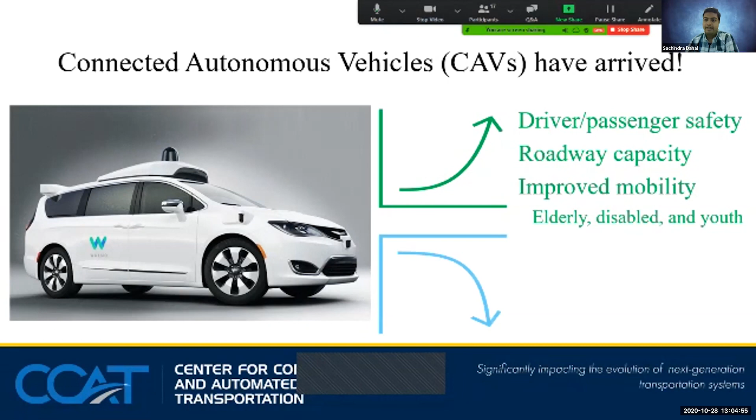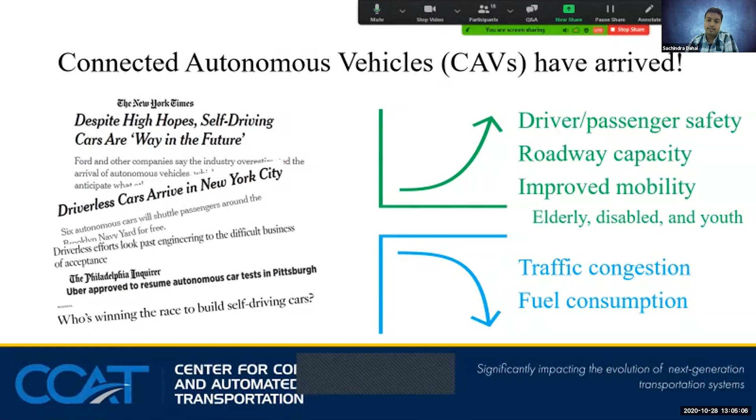Our first student is Sachindra Dahal from the University of Illinois. Sachindra, you may begin. Hello everyone, my name is Sachindra Dahal. I'm a PhD student at University of Illinois at Urbana-Champaign. I'm going to present about passive sensing of conductive concrete for vehicle lateral positioning. So connected autonomous vehicles have arrived in different shape, size, form with different promises. They provide increased driver and passenger safety, increased roadway capacity, improved mobility for elderly, disabled, and youth. And they also provide decrease in traffic congestion and fuel consumption.

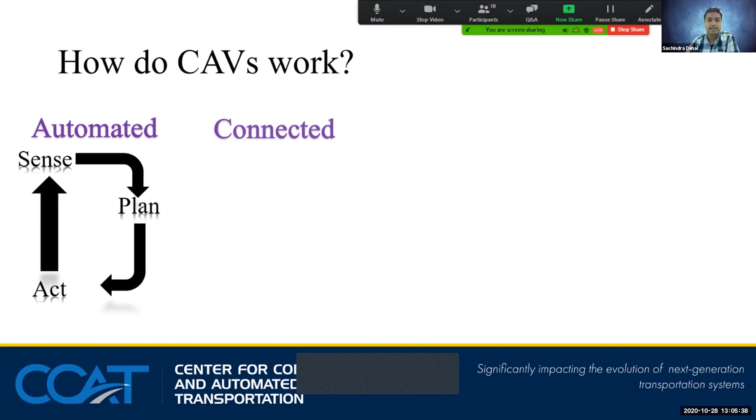So to discuss how CAVs work, they have 2 parts, the connected part and the automated part. The automated part consists of sensing, planning, and acting. The sensor senses the environment, then the machine learning or computer vision algorithms plan the path based on that, and the actuators execute the command given by these algorithms. And there is the connected part, which consists of DSRC or cellular methods to implement vehicle to everything communication, basically vehicle to infrastructure and vehicle to pedestrian.

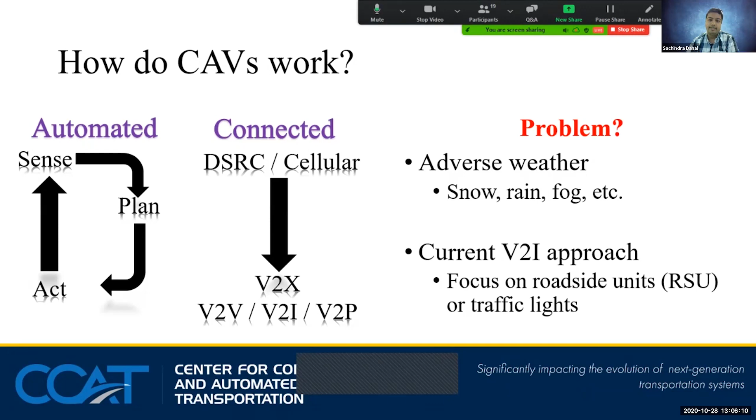But the problem is when we have adverse weather like snow, rain, or fog, the sensing part of the automated section gets affected. And the current vehicle to infrastructure approach just focuses on roadside units or traffic lights. So the biggest infrastructure, the road itself, is missing in action. Currently CAVs use GPS as a primary sensor to stay in lane, which gets coordinates from satellite. But the error is around 20 feet while the lane is just 12 feet wide. So the vehicles also use cameras with computer vision to find the lane markings and stay within the lane where the GPS tells it to. So basically it is sensor fusion of GPS, camera, LiDAR, and existing maps, using redundant information to predict better.

But one big problem is improper lane marking. Not everywhere is there proper lane marking. And even if there is proper lane marking, bad weather affects the camera. So lane markings are not visible, or the GPS signal is worsened. To put into context, 33 states receive more than 10 inches of snow annually. In February 2019, 60% of the US was covered in snow. So weather independence is needed for large-scale deployment of CAVs. So the question arises, are the roads smart enough right now? The answer is no, because they don't communicate with CAVs.

So roadways can actually supplement the current CAV sensors to improve lateral positioning, even when conditions are adverse. We can achieve that by using passive sensing. We can create a repeatable electromagnetic signature, which is pretty unique and can be identified by the autonomous vehicle. And we can create those signals in the pavement using construction materials commonly used in the pavement industry, like steel fiber or steel slag aggregates. We don't have to use expensive sensors or something that consumes power or needs a lot of wiring.

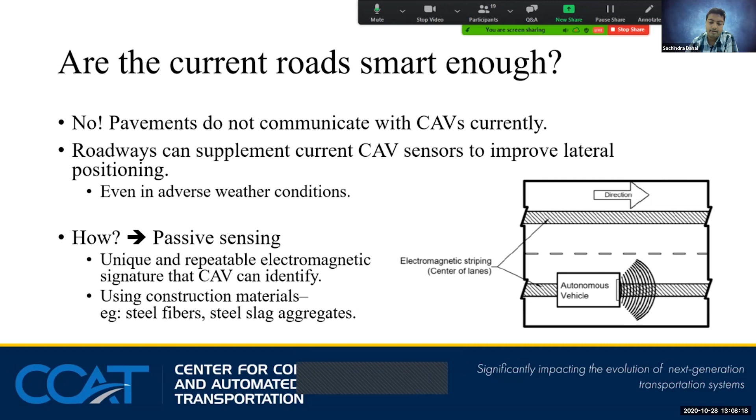So I'll discuss the lab testing that is going on here at U of I. We use a sensor, which is an induction-based eddy current method, and it creates an alternating magnetic field using a 10-inch diameter coil at 200 Hertz. Whenever a metal target is brought into this field, it induces an eddy current, which is detected by the sensor. In our case, it is steel fiber reinforced concrete.

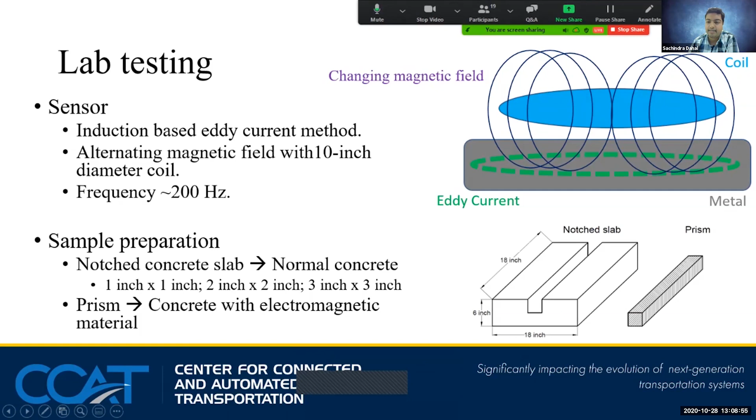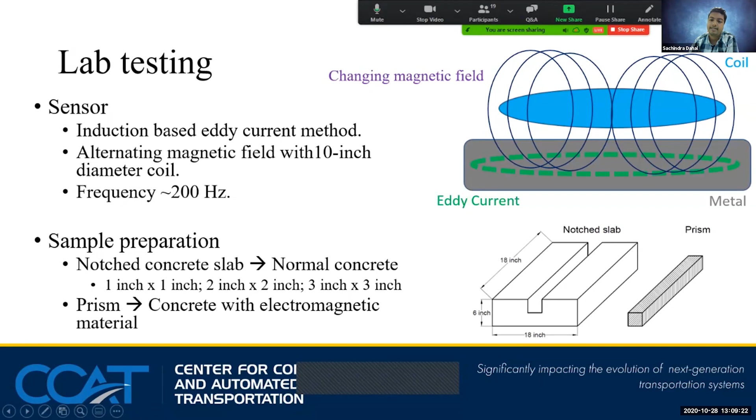So how we test it is we prepare a slab. We have made a slab which is 18 inches wide, 18 inches in length, and 6 inches in height. And on the top middle surface, we have made a notch which is 1 inch by 1 inch, or 2 inch by 2 inch, or 3 inch by 3 inch. And what we do is we make an electromagnetic prism, or a concrete prism that has steel fiber in it, and we make those prisms of the exact size and put them into this and do the testing.

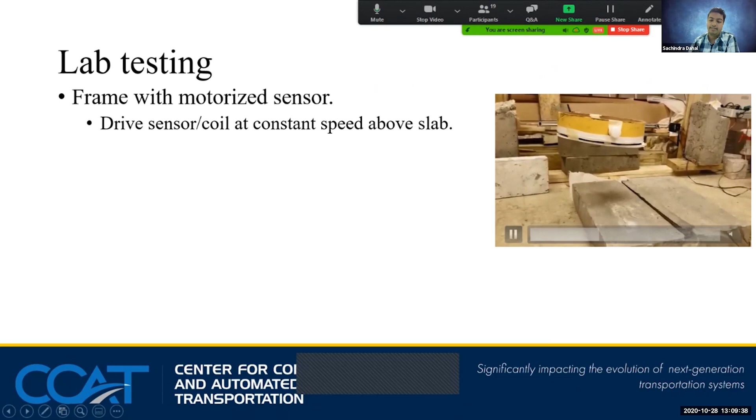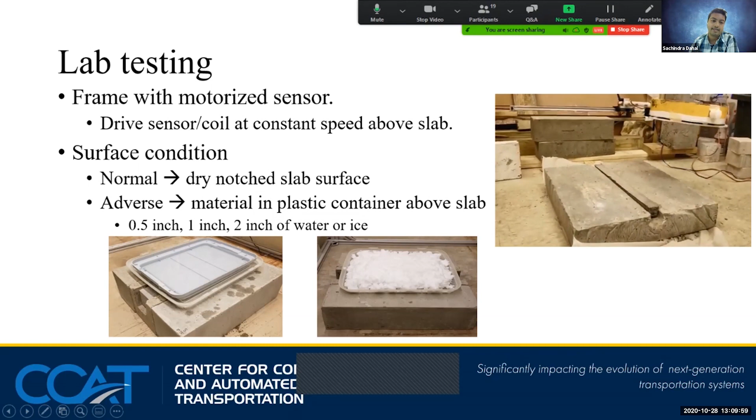So we mount the coil on a motorized frame, and the sensor is driven at a fixed height above the slab, and it is moved at a constant speed to collect the data. In addition to the normal surface condition, we also test it in different adverse weather conditions, which are created by having a plastic container, which is not electromagnetic, with 0.5 inch, 1 inch, and 2 inches of ice or water standing in the plastic container during the testing.

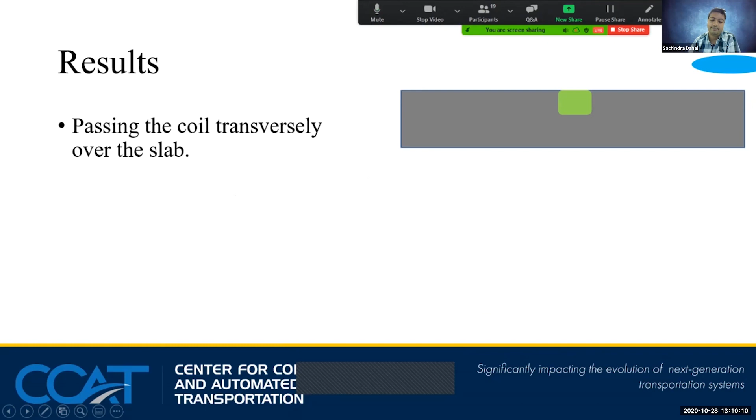So I'll present some of the results that we get when we pass the coil on top of the slab transversely. This is an example signature. What we observe is, there is this electromagnetic prism, and as we move the sensor above, the highest signal is achieved directly over the electromagnetic material. And as we move offset from that material, the signal drops off. This is an example where we change the height of the sensor above the slab. When we increase it from 5 to 6 to 7 inches, the signal decreases.

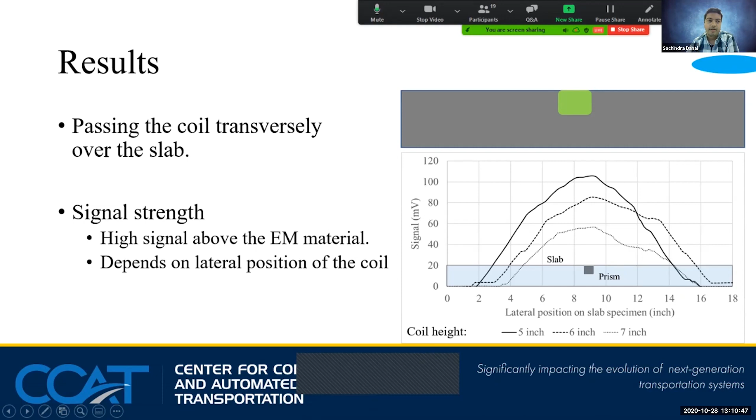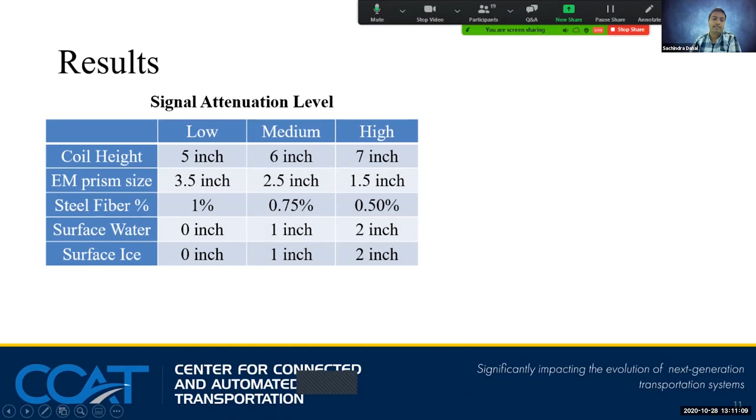So there are different factors that would attenuate the signal. To test that, we created different factors: sensor height, electromagnetic prism size, steel fiber content in the prism, and having water or ice on the surface. We changed these parameters at 3 different signal attenuation levels. The lowest signal attenuation gives us the best signal, and we increase each of these parameters and see how the signal deteriorates. For example, this point is when the coil height is at 5 inches, the steel prism is 3.5 inches wide, and we have 1% steel fiber without ice or water. We get this signal, and we change each parameter and see how the signal attenuates.

So what we observed is these 3 parameters, which are prism size, sensor height above the slab, and fiber content, attenuate the signal the most. And these are the factors that can be controlled during design. We can say what size of prism we need in the road, at what height we can put the sensor in a vehicle, or what fiber content we can put in the road.

As for water, when we had 2 inches of water standing on the slab, the signal attenuated by 23%, but it was still detected. And when we put 2 inches of ice on the surface, we did not see any signal attenuation. That's because ice has a dielectric constant of 3, which is similar to that of air, versus water, which has 81.

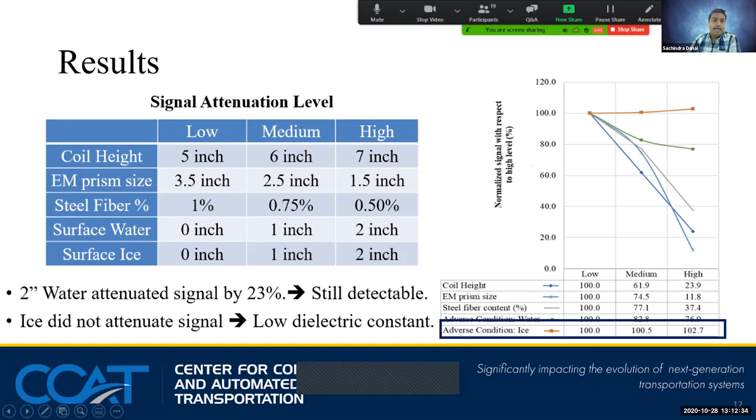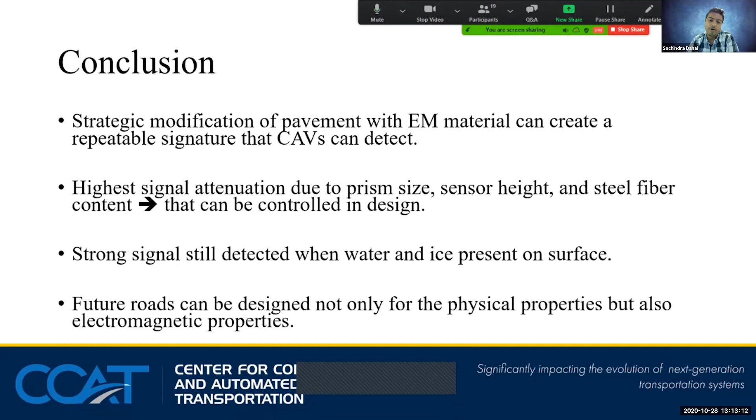So in conclusion, we can strategically modify the pavement material to create an electromagnetic signature that is repeatable and can be detected by CAVs. From our research, some of the highest signal attenuation parameters can be controlled in the design process. A strong signal was still detected when adverse conditions were present. And for the future, roads can be designed not just for physical properties, but also for electromagnetic properties to help connected and autonomous vehicles.

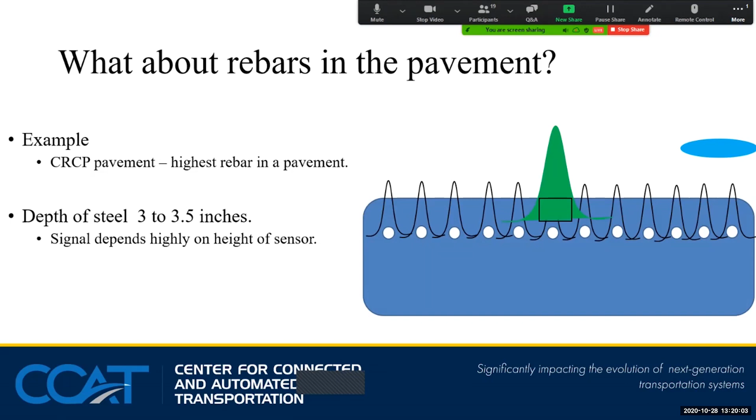Hello, everyone. I'm Xingmin Wang, a third-year PhD candidate from the University of Michigan, advised by Mr. Henry Liu. The topic I present today is the data infrastructure for connected vehicle applications. The data infrastructure we built is based on the Ann Arbor Connected Vehicle Test Environment, which is short for AACVTE project.

This project comes from the original safety pilot model deployment, which was started in 2012, and in 2015 the safety pilot model deployment project became the current AACVTE project, which is still the largest operational real-world deployment of connected vehicles. For the vehicle deployment, the AACVTE project has installed over 2,500 vehicles, which were equipped with either aftermarket safety devices or vehicle awareness devices.

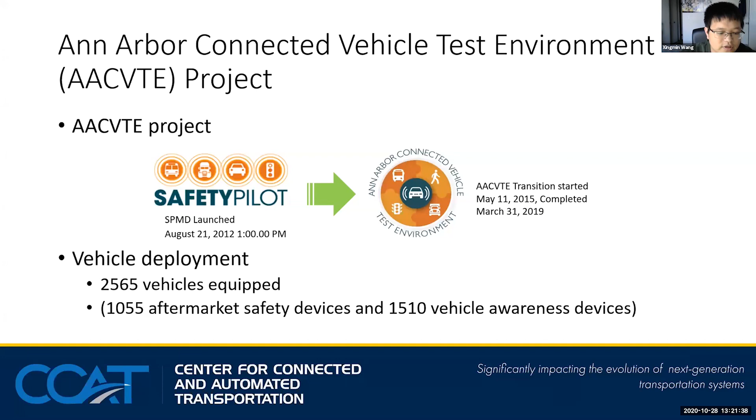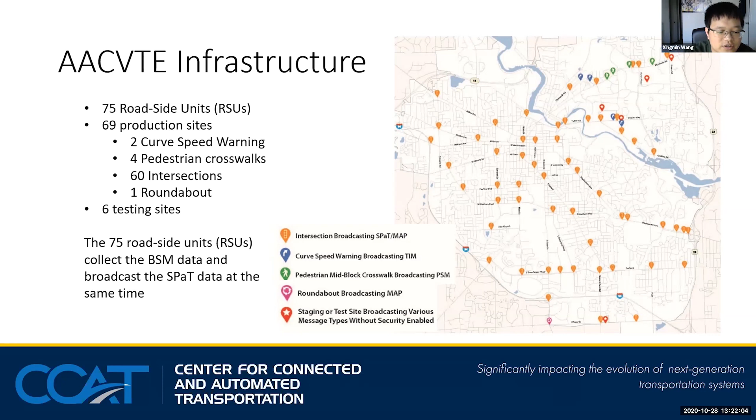From the infrastructure side, the AACVTE project has installed over 75 roadside units, including 69 production sites and 6 testing sites. All the roadside units collect the basic safety message data and broadcast the signal phase and timing data at the same time. The communication range between the vehicle and the roadside infrastructure is about 100 to 200 meters.

For the data contents, we have 2 main data sources. The first is the basic safety message data broadcast by the vehicles, which follows the SAE standard. This message contains the real-time latitude, longitude, and time stamp, and also other safety-related messages of the vehicles. The other data source is the SPaT data, which is the signal phase and timing data. This data is sent directly from the controller, and contains all the signal states of the intersection phases.

For the resolution and the transmission delay, both data were sent every 0.1 second, and the delay was within 1 second, which can definitely support real-time applications. Based on this data collected from the AACVTE project, we built a data infrastructure to process and visualize the raw data for real-time connected vehicle applications.

Basically, the data infrastructure contains 3 parts. The first is the data receiving part, the second is the data pre-processing, and the last is the upper layer applications. For data processing, we have 2 different data sources. The first is SPaT data, and then the BSM data. Both have to be decoded before they can finally be used. From the other side, we also need offline map data, which is from the open source map, OpenStreetMap.

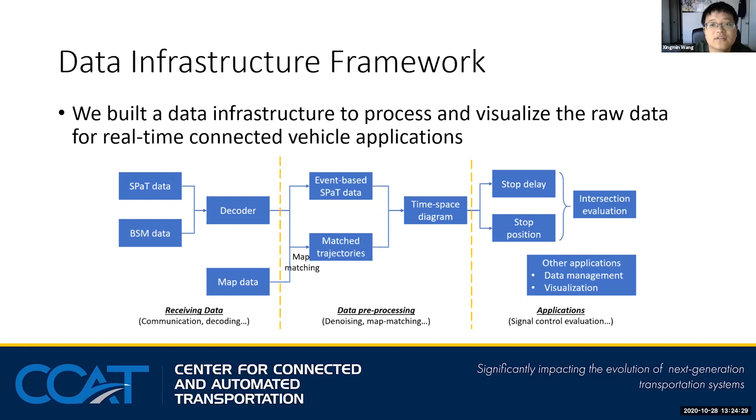Due to the limited time, I will skip some of the data pre-processing procedures, such as the denoising and the smoothing. The most important part of the data processing is the trajectory data map matching. The BSM data we collected is only collected near the roadside units, so the map matching here is to match the trajectory data to the corresponding movements.

And here we use a hidden Markov model to match the trajectory data. As shown in the left figure, both the movements shown by the blue lines and the trajectories shown by the red lines can be represented as a vector composed of series GPS points. And the xi here is the GPS point of the trajectory, and the di here is the distance between the trajectory point and the road movement. And the phi here is the angle between the heading of the vehicle trajectory and the road movement. And for the hidden Markov model, we consider 2 factors to do the map matching.

The first is the state probability, which is the distance between the GPS point and the road movement. Here we assume that given a trajectory belongs to a road movement, the distance follows the Gaussian distribution. And the other side is the transition probability in the hidden Markov model. Here we define this as the heading angle between the vehicle trajectory and the road movement. Basically, here we assume that the transition probability follows exponential distribution.

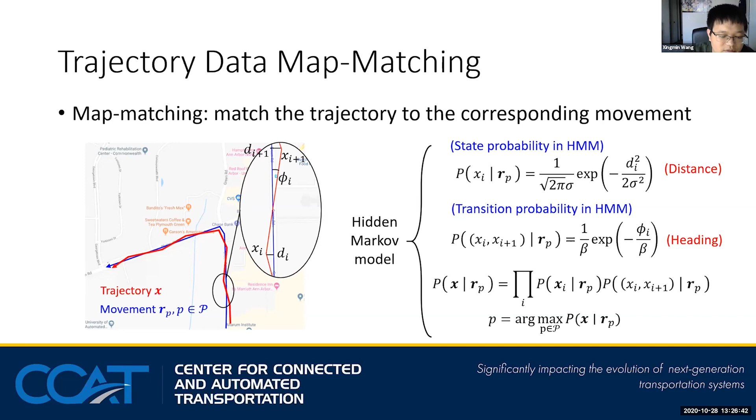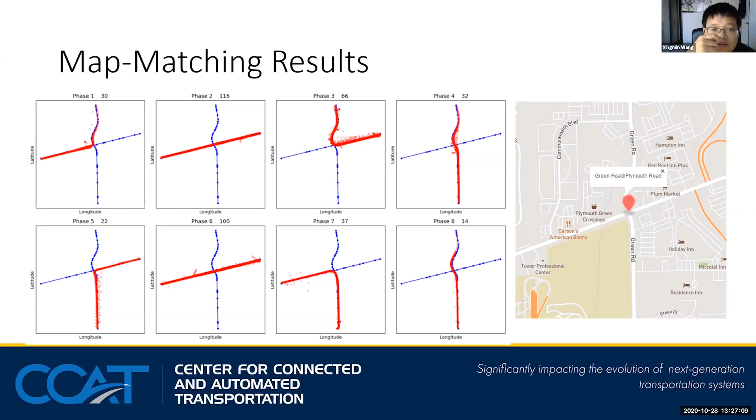And here are the results for the trajectory data map matching. Each subplot stands for a movement of the intersection. The horizontal axis is longitude, and the vertical axis is latitude. The blue points and the dots are the road, and the red points are the matched trajectories. As we can see, using our algorithm, most of the trajectory points were matched to the road correctly.

And combining the signal phase and timing data and the matched trajectory data, we can draw the aggregated time space diagram to evaluate the traffic intersection signal control. Since most of the traffic signals in the city of Ann Arbor are actuated or adaptive signal control, the cycle lengths of different cycles are usually different. So here is what we do to draw the aggregated time space diagram. We have the trajectories of different cycles, and we can shift the trajectory in different cycles so that they share the same green start time. And finally, we can draw the aggregated time space diagram, which will be frequently used to evaluate the efficiency of the intersections.

And to evaluate the traffic signal control, we also draw the stop delay scatters and the stop position scatters. So the left figure shows, given a trajectory, how we can calculate its maximum stop position and also the total stop delay. And with this method, we can plot each trajectory as a point to get the stop position scatters and the stop delay scatters as shown by the two right figures. The horizontal axis is the time of day when the vehicle traverses the intersection, and the vertical axis is the stop position and the stop delay accordingly. And based on these figures, we can easily evaluate the efficiency of the intersection signal control.

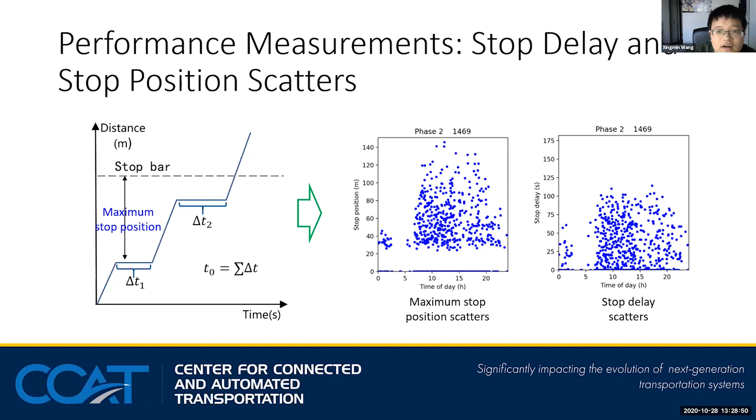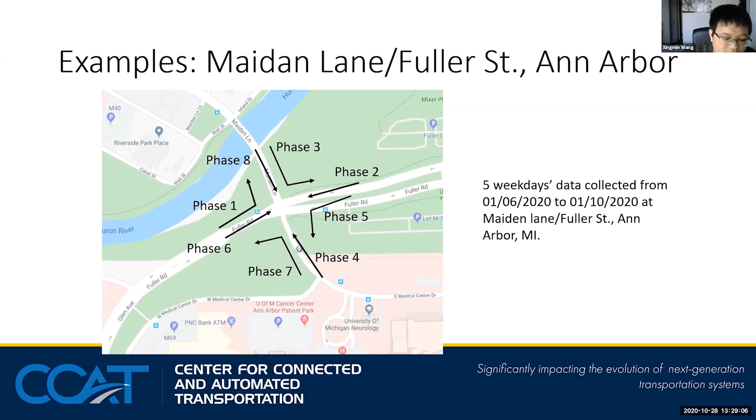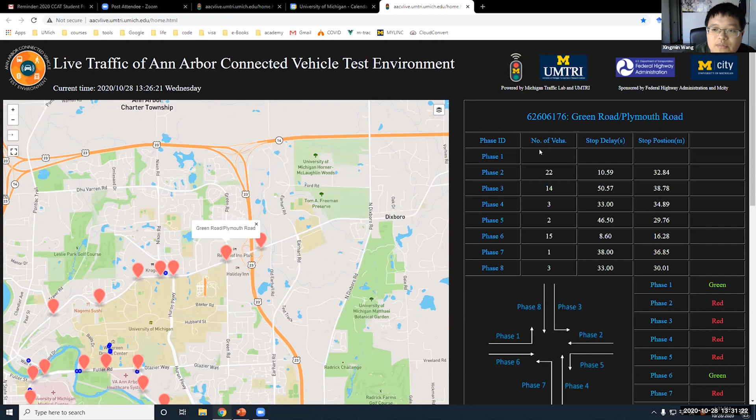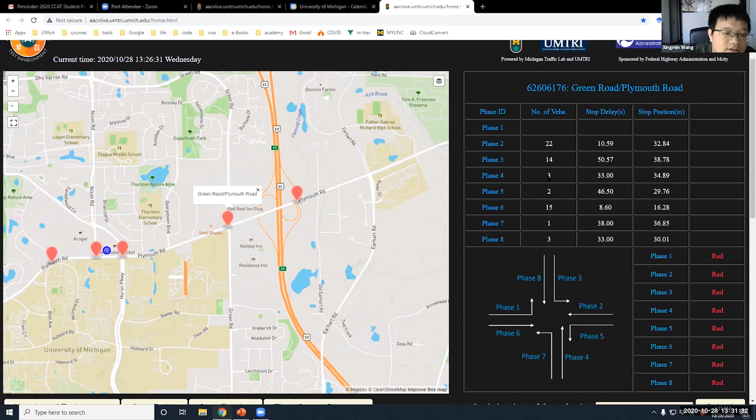And from this website, if we click on the markers, we can see the basic statistics of the specific intersection. For example, the number of vehicles passed by the intersection for different phases, also the average stop delay, average stop positions, and also the plots we mentioned before, including the stop delay scatters, the stop position, the time-space diagram, and also the number of vehicles within the day.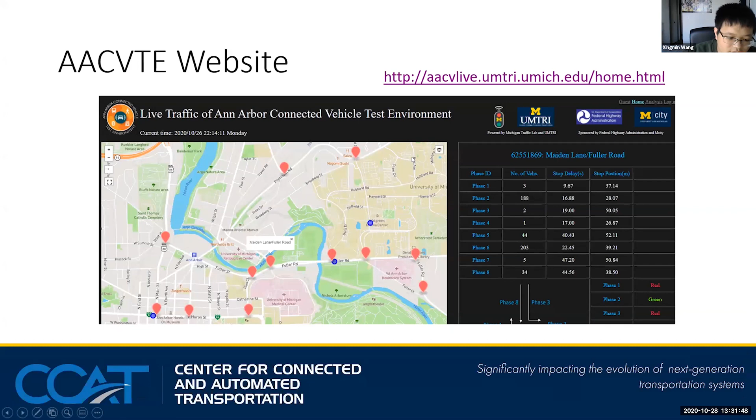Okay. As we mentioned before, there are different applications that can be built based on these data infrastructures that were developed. For urban traffic mobility, we can use this data for traffic estimation and traffic signal control. Actually, this is what I have done all the time. And on the other side, we can use this data to do some safety measurement.

For example, as far as I know, I'm very glad that this data set has supported at least 2 projects. The first is to use this data to identify the aggressive drivers, and the other project I know is to use this data to detect the dilemma zone, and furthermore to optimize the yellow and all-red clearance time of the intersection.

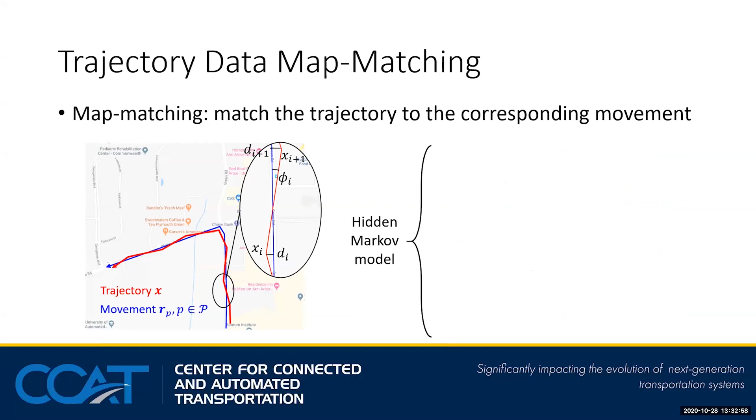Yes, I have a question. I'm trying to understand your overall process. So the cars which are equipped with the receiver for the connected vehicles, they are driving around and they're communicating with the infrastructure, and then the cars are sending this data to a server. Where is the raw data coming from, and going to where before you're doing the processing?

Okay, I'm sorry that I did not make this part clear, and I will try to explain it. So first, the car equipped with the onboard unit can broadcast the basic safety message, and this data will be sent to the roadside unit via DSRC, and then the data is transferred through IPv4 to the city network, and then the data is forwarded to the server located at Ann Arbor, and then we can query the data through UDP.

So what is the delay from when the car is sending the data to when it arrives at Ann Arbor? And then what additional delay for processing? Here is the delay. So the average delay for the basic safety message is about 0.3 seconds, which means that from when the data was generated from the onboard unit until we receive it, the overall delay was about 0.3 seconds. I see. So overall delay is around 0.3 seconds.

Okay. Thank you. So currently, when we look at traffic signal performance measures, we talk about arrival on green. So is your system equipped to measure that so that we can do some automated signal performance measures? Yeah. Actually, currently we use these 2 plots to evaluate the traffic signal control. The first is the stop delay scatters. Basically, we calculate the stop delay for each trajectory and plot it in these scatters.

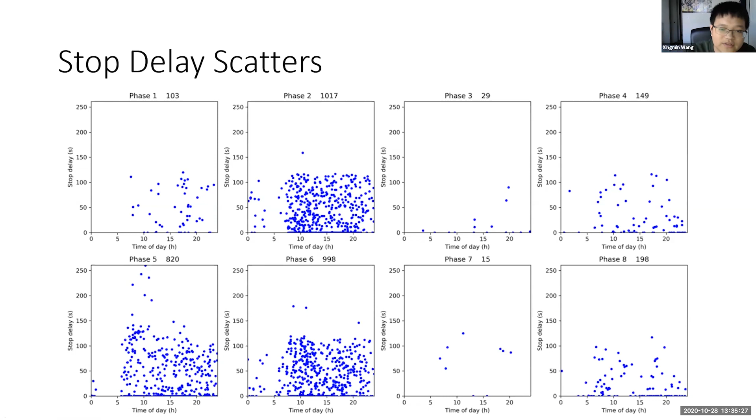And this is for the delay. And we also have the stop position scatters. This stands for the queue length of the different phases.

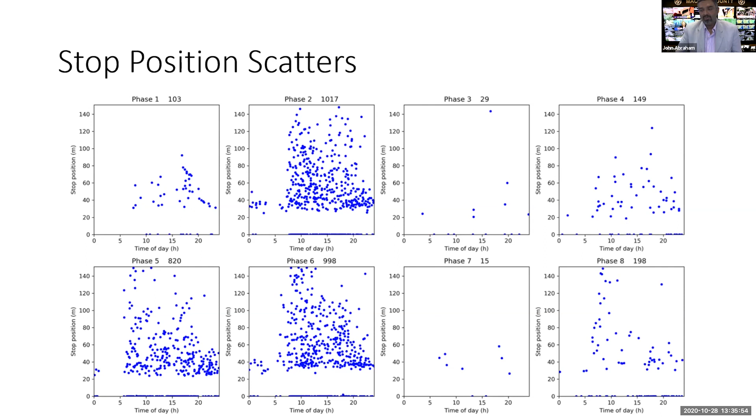Now, you talked about applications for transportation engineering. How much penetration of vehicles? For example, do you need 20% connected vehicles in a traffic stream to come up to having useful data for these traffic applications? Well, that's a very good question, and this is a research topic I have done since last year.

The intuition is that if we have different levels of the penetration rate, we can do different levels of traffic signal control. For example, if the penetration rate is too low, then maybe we can only use it for the fixed timing plan optimization. But with a higher penetration rate, we might be able to use this data to perform real-time signal control.

But for this data set, currently the penetration rate is less than 3%. So we might not be able to use this data for real-time signal optimization, but we might be able to use this data to optimize, for example, a fixed timing plan or something like that. I think the penetration rate will be okay for the fixed timing plan optimization.

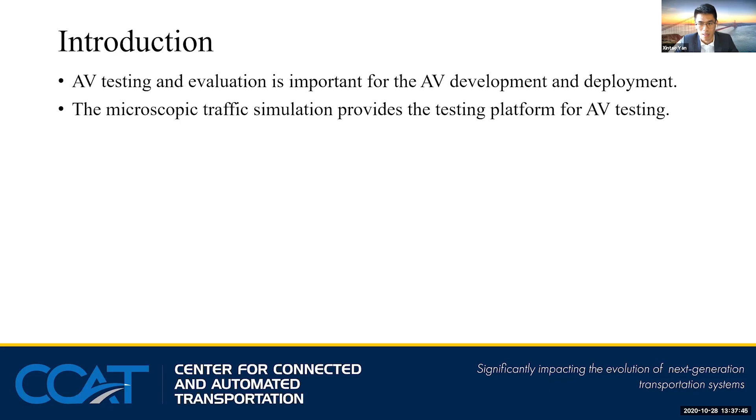So the first thing is that AV testing and evaluation is very important for AV development and deployment. Microscopic traffic simulation provides a testing platform for AV testing. The key idea is to test the AV safety performance in the simulation environment and make statistical comparisons with human driver performance. For example, here are two widely used microscopic traffic simulators, VISSIM and SUMO.

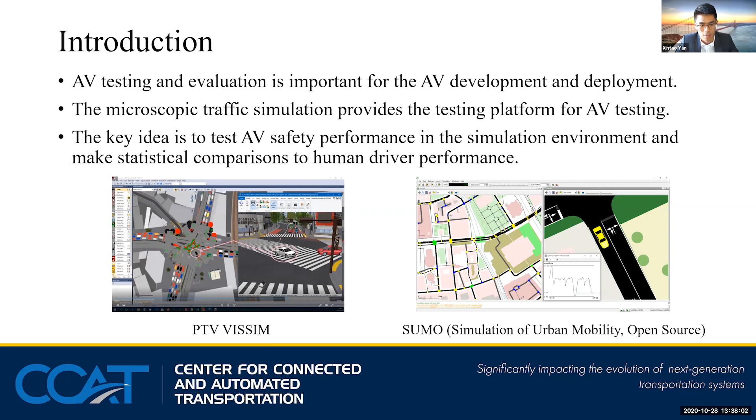However, one key problem with existing microscopic simulation platforms is that the traffic behavior models lack fidelity and cannot be directly used for AV testing purposes. The major goal of existing behavior models is to evaluate the traffic efficiency and emissions of large-scale transportation systems. Therefore, the models were designed to roughly capture normal behavior patterns, and usually only a small set of data is used for model calibration.

However, for AV testing, the major goal is to evaluate the accident rate of the autonomous vehicle in a real-world traffic environment. For human drivers, the accident rate is normally about 10 to the minus 6 to 10 to the minus 8 per mile from naturalistic driving data. Therefore, for these rare accident events, the traffic behavior models should be precise in both normal and rare conditions. So there's a huge gap that needs to be filled.

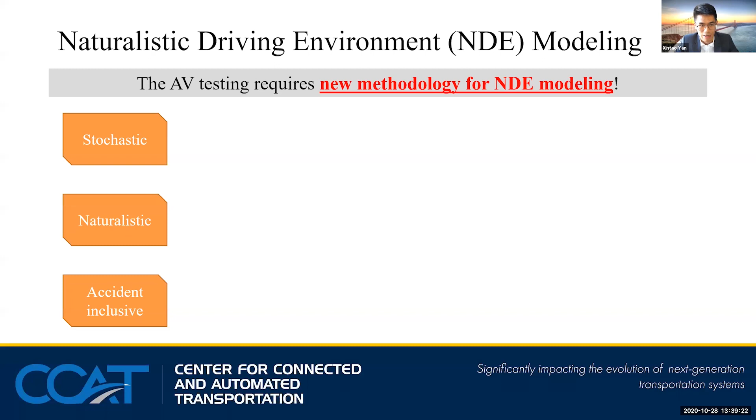We denote this problem as the naturalistic driving environment modeling problem. We need to generate a naturalistic driving environment which is stochastic, naturalistic, and accident inclusive. To generate such an environment, the behavior model of the vehicles needs to be distributionally consistent with the real-world traffic environment.

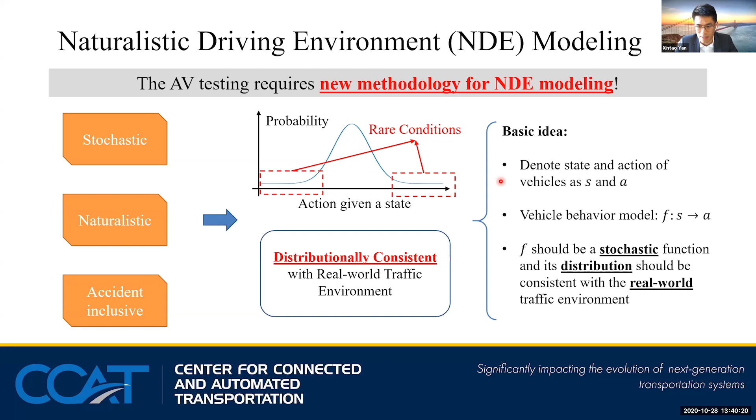To further extend this idea, we denote the state and action of vehicles as S and A. The vehicle behavior model is actually a function, a mapping F from the state to action space. The function F should be a stochastic function, and its distribution should be consistent with the real-world traffic environment. Therefore, we propose the framework of data-driven naturalistic driving environment modeling.

There are three steps. The first one is naturalistic driving data collection and pre-processing. The naturalistic driving data, NDD, is very important because it records human driving behaviors when facing different situations, which is very important if you want to construct a realistic environment. Here we use the NDD collected by UMTRI at the University of Michigan for this study.

The second step is data-driven driving behavior modeling. From the NDD, we can classify driving behaviors into categories, for example car following, lane changing, free flow, etc. Then we get the empirical behavior models, the empirical distributions of the behaviors. For example, this figure shows the longitudinal acceleration distribution in free flow driving situations, given different speeds of the ego vehicle.

However, due to inevitable data noise and the high dimensional nature of human driving behaviors, simply using the empirical behavior models may lead to bad results because the error accumulates along the simulation. Therefore, we proposed optimization-based smoothing techniques to improve the empirical behavior models to match the empirical measurement distribution. For example, we choose the velocity distribution, obtained directly from the NDD, and match the simulated velocity distribution with the empirical one from the real world.

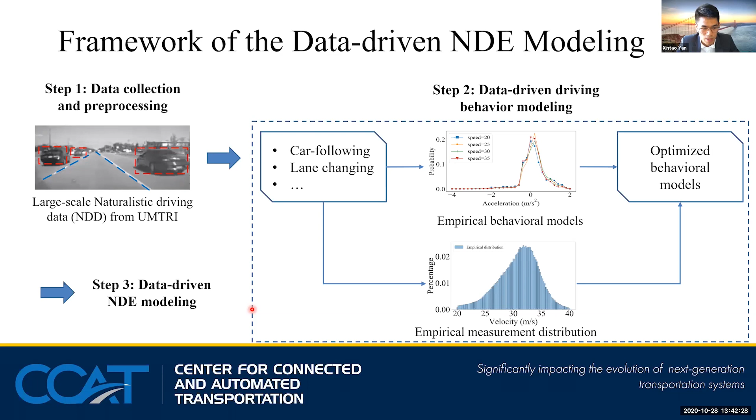Here is how we optimize the longitudinal behavior models. Due to the time limit, I won't go into the details of the optimization formulation, but the key idea is that we model the NDE as a Markov chain, and the convex optimization problem is formulated to optimize the longitudinal behavior model to reach a realistic NDE.

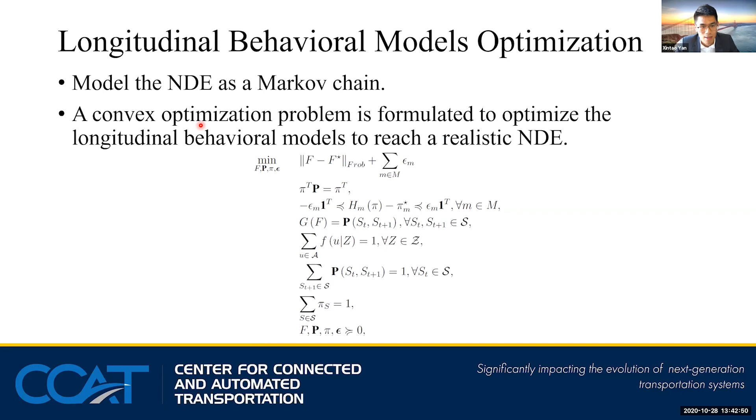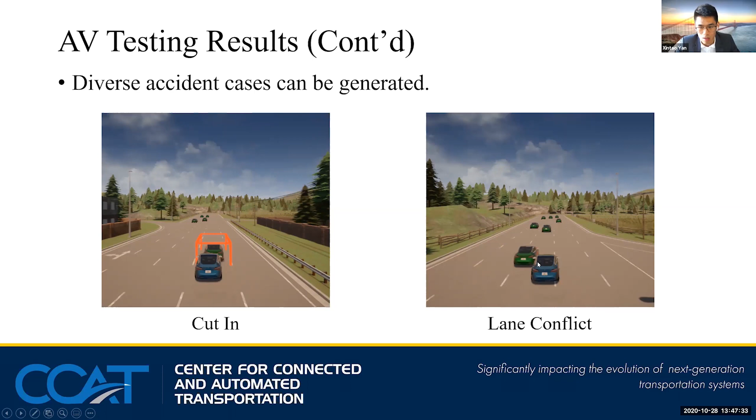Sorry. Okay, this is our results.

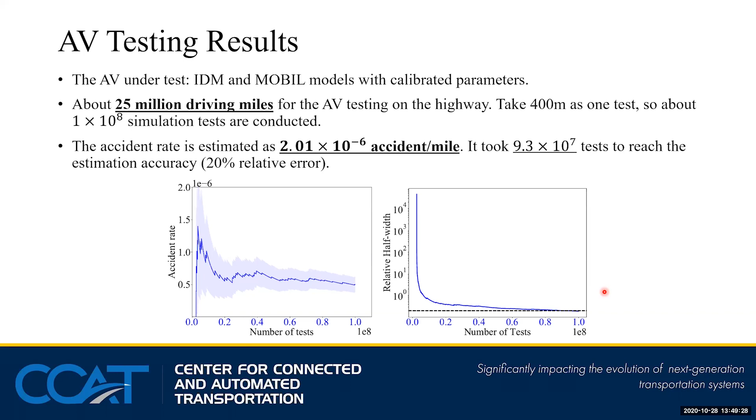That's a very good question. The idea we are using here is that the behavior model directly comes from the NDD data, and after optimization, we choose certain measurements to measure the error, whether this simulation produces a good environment compared with the real world. So here we choose velocity and spacing, because the velocity of vehicles and the distance between each vehicle is very important and will affect AV performance in the testing, right?

Yes, do you have an idea of what you need to do to make the distribution much closer? Oh, yes. The reason why there's still a gap here is because in the optimization step, we do some relaxation. So the model is not exactly accurate, for computational burden consideration. So maybe in the future, we will improve the optimization formulation to make it more accurate, to discard some of the relaxations. And another way is that we might try different methods, maybe machine learning based methods, to substitute these optimization methods to further improve the model performance.

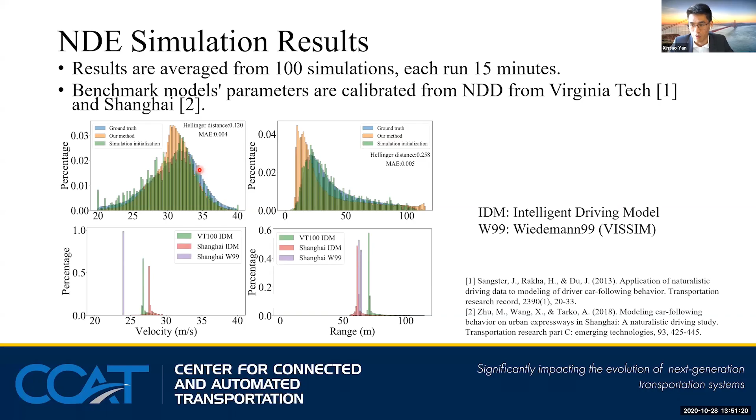Today, I'm going to talk about the integrated traffic signal and vehicle trajectory control in a mixed traffic condition. I think most of you have heard of connected and automated vehicles. They can communicate with other systems by V2X technology, sense the environment, and perform specific driving tasks with automation. Here, I give you two examples of connected or automated vehicles in University of Michigan. The first one is an M-Bus, which is a connected vehicle. The second one is a Navya shuttle running in M-City, which is an automated vehicle.

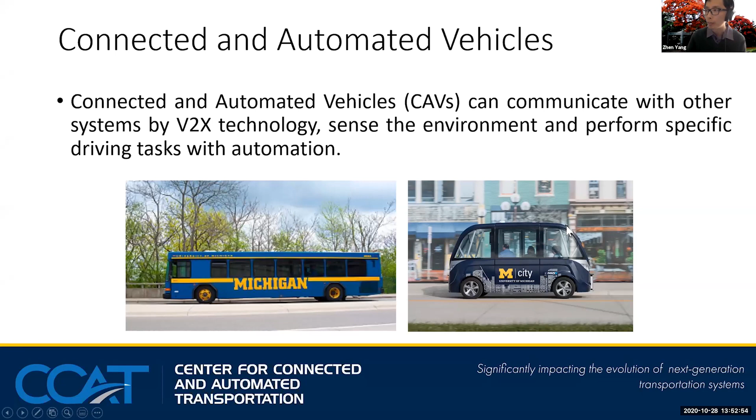The current existing solutions to CAV, say SAE level 3 or higher, require multiple expensive onboard sensors. So if we look at the automated vehicle of Google, you can see that it has a LiDAR, radar, cameras, all different kinds of expensive onboard sensors. It also requires complicated trajectory planning and vehicle control algorithms, which bring a challenge in real-world implementation, especially in urban traffic. One way to address this problem is to have smart infrastructure. So this table is provided by researchers in Europe. They define the infrastructure level.

With the lowest level, we have the conventional infrastructure. And when we improve the smart infrastructure level, we can have the map information support to CAV, we have the dynamic information, say the weather condition, or we may provide cooperative perception so the smart infrastructure can perceive the traffic situation and provide those perception to CAVs.

And finally, we have the cooperative driving smart infrastructure, which can provide support to CAVs and manage all vehicles in mixed traffic conditions. So the key research question is whether we can improve the smart infrastructure level to have lower requirement for CAV level.

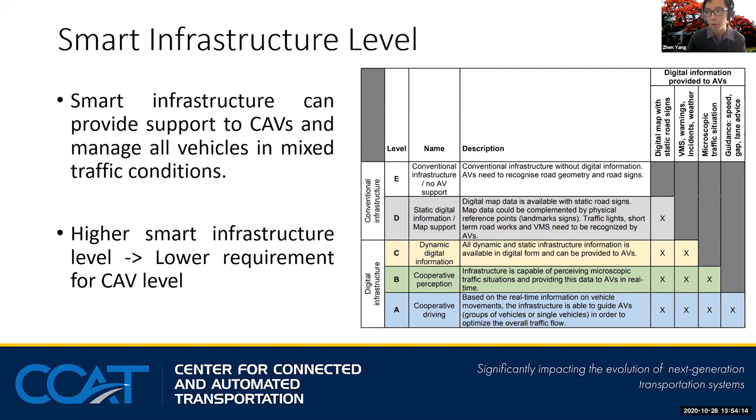That's the reason why I proposed this cooperative driving framework, which mainly includes two parts, the CAV module and infrastructure module. So we consider a mixed traffic condition in which we have the connected and automated vehicles. Those vehicles can broadcast their basic safety message, and they can also be controlled by some specific algorithm. We also have connected vehicles which are driven by human beings, but they can also broadcast their information.

And finally, we have the regular vehicles, which are driven by human beings. They do not have any connectivity or automation. So for the connected vehicles, we consider the cooperation between CAVs. When several CAVs are close to each other, they can form a platoon. The platoon may split. And for the leading vehicle of the platoon, it needs to plan the trajectory for the whole platoon, whether the platoon needs to stop, speed up,

cruise, or slow down. The main functionality of the smart infrastructure is signal optimization, which optimizes the time of arrival for each CAV at the stop bar, which will be sent as guidance to each CAV.

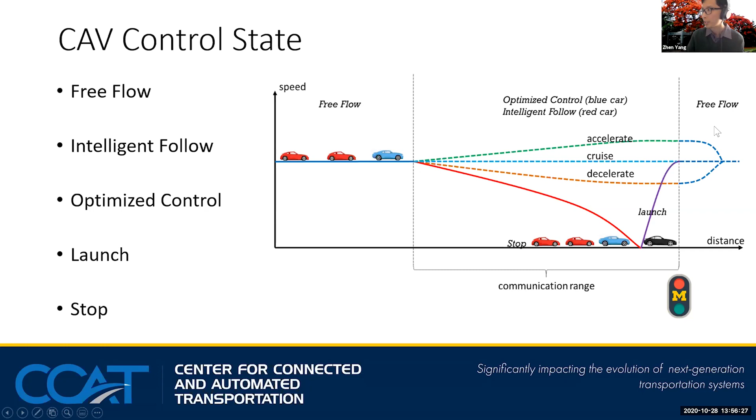Next is the infrastructure module. The first functionality is queuing prediction. Basically, all the vehicles are sorted based on the distance to the stop bar. For connected vehicles or connected and automated vehicles, we can use their basic safety message to get the distance to the stop bar. For regular vehicles, we use an entrance loop detector to estimate their distance to the stop bar.

After that, they are searched successively to determine whether a vehicle will stop. With queuing prediction, we are able to provide the green window information for a CAV to say whether it can pass this intersection.

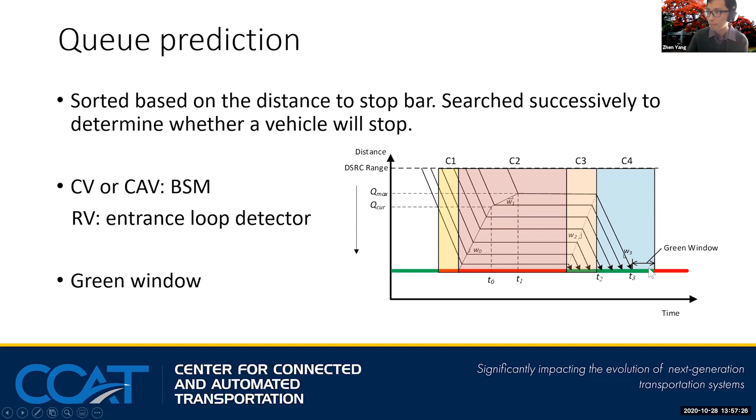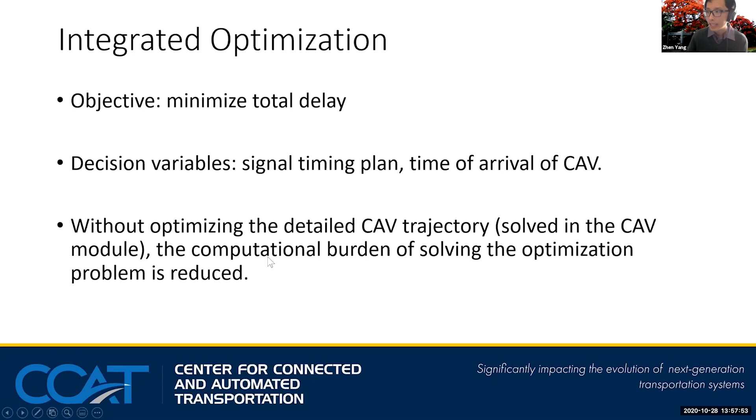Another very important functionality of the smart infrastructure is the integrated optimization. The objective is to minimize the total delay of all vehicles. The decision variables are the signal timing plan and also the time of arrival of each CAV. Notice that we do not optimize the detailed CAV trajectory at the smart infrastructure. The detailed CAV trajectory is solved in the CAV module. In this way, we reduce the computational burden at the smart infrastructure.

Here is the simulation analysis.

In the infrastructure module, we have the queuing profile prediction and signal optimization. So after the signal optimization, the optimized signal timing plan will be sent to the signal controller, and the arrival time will be sent to the CAV module to plan its trajectory. After the simulation, we'll use the post-analysis module to get the fuel consumption and emission.

So we use the intersection of Plymouth Road and Murfin Avenue in Ann Arbor, Michigan. The baseline we have is actuated signal control. And basically, we conducted two groups of experiments: the first one is with CAV and CV. The second one is with CAV and RV, and under different penetration rates.

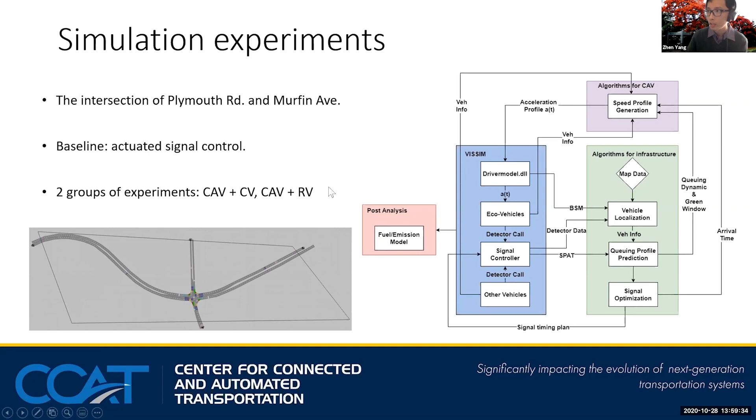The second group is with CAV and RV. In general, the performance is still similar. When we have more penetration, more CAV, we can have better performance in terms of mobility and fuel consumption. There's just one thing for the number of stops. As you can see, if we increase the penetration rate, the performance goes worse a little bit and then goes better. The reason is that with regular vehicles, we cannot estimate the queue length very accurately. So that actually leads to a bad performance when we have less CAV.

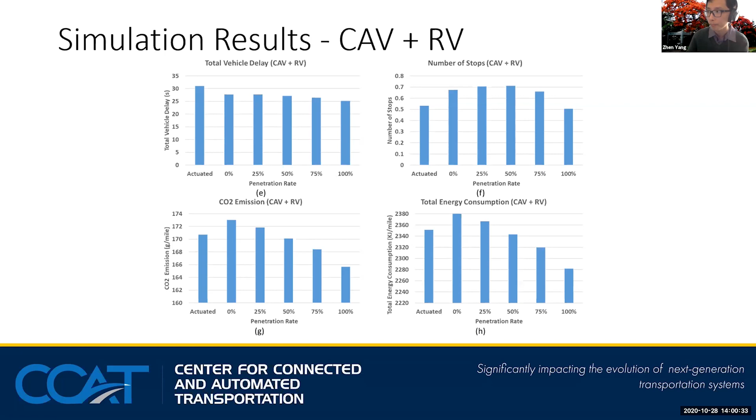So in conclusion, I proposed a cooperative driving framework in a mixed traffic condition of regular vehicles, connected vehicles, and connected automated vehicles. At the CAV module, we proposed a CAV control state transition diagram for different operating modes. At the infrastructure module, we optimized the traffic signal and also the CAV time of arrival with a mixed integer linear programming problem. The simulation results of a signalized intersection show the benefit of mobility and fuel consumption, and the delay reduction can be as high as 18.7% at high penetration rates of CAVs.

Notice that we also extend this work to a traffic corridor in which we consider the coordination between different intersections. Due to time limit, I cannot present that work here. And that's all I have.

Thank you. Maybe I'll ask you about the definition of connected vehicles as opposed to connected and automated. Yeah, so connected vehicles are driven by human beings, but they can provide basic safety messages through the onboard unit. Connected and automated vehicles not only provide such information through connectivity, but they are also controlled by some specific autonomous driving trajectory planning algorithm. Thank you. Yeah, thank you.

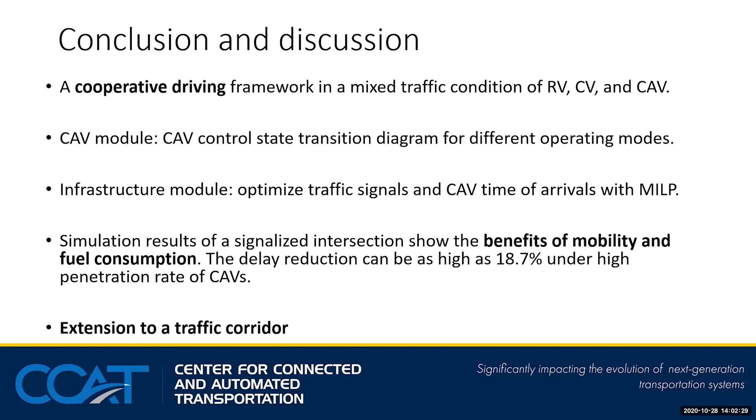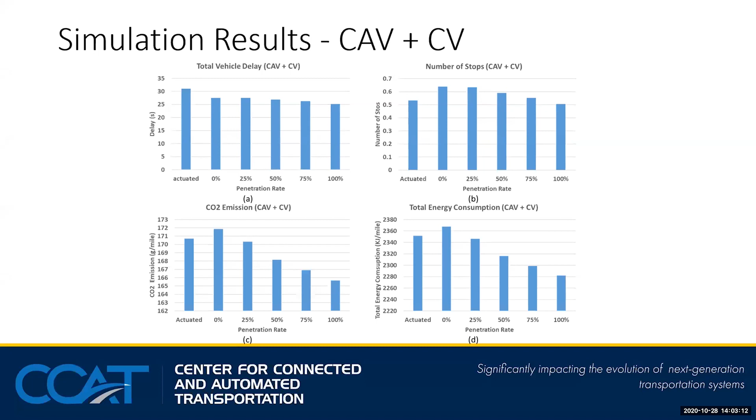I see. So when you said the total vehicle delay, is that the total vehicle delay in driving time? Oh, yes, exactly. Okay. And did you look into any kind of safety aspect? While you're optimizing these other things, is there anything on the safety side that's getting disadvantaged, or is safety always maintained while you're doing these things?

Yeah, that's a very good point. Due to time limitation, I'm not able to mention that, but when we design the CAV trajectory planning algorithm, we do consider collision avoidance, to avoid collision with other vehicles. Yes. Thank you for your question. That's a good question. Thank you.

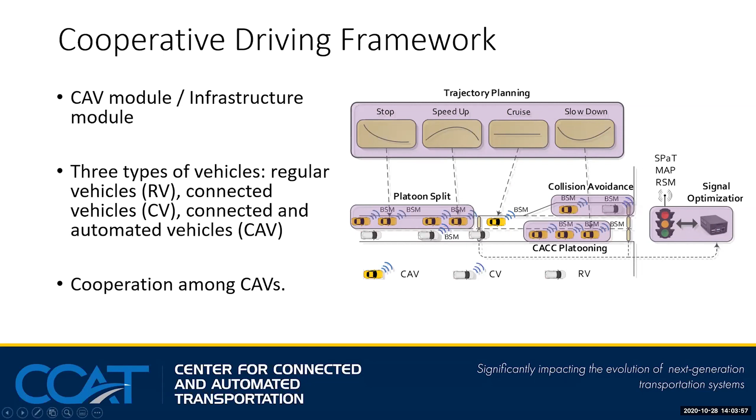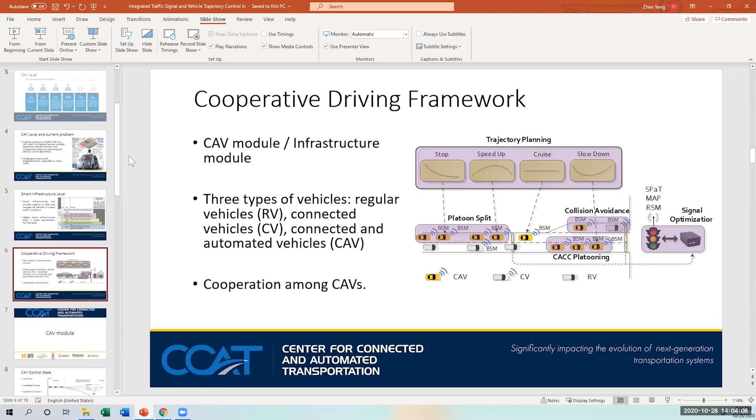And we'd like to bring Al Lecz to discuss the student outreach efforts here at CCAT. Al Lecz is the director of the Advanced Transportation Center at Washtenaw Community College, a consortium member of CCAT. In this role, Al works collaboratively with credit and non-credit administrators and faculty to provide industry leadership related to training, programming, and other educational services.

All right, so I wanted to talk about outreach, specifically as we really address students, but outreach in general. In the CCAT grant, this has become one of our major contributions to the grant in terms of outreach, which I will go through here shortly. Many of the areas of outreach have to do with community engagements, student forums, business and employer events, conferences and regional events, tours and hosted events at Washtenaw Community College, and media and news.